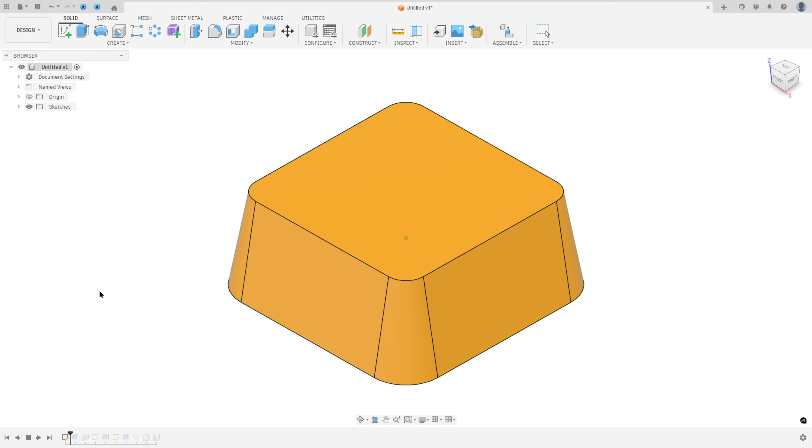Let's create one more tutorial in Autodesk Fusion. In this video, you'll learn to use extrude, offset plane, circular pattern, fillet, and shell. So open the Fusion and let's go.

The first step to create this part, we will select the top plane and make this sketch. And here we will create a square with 120 millimeters. And in the corners, we have a fillet with 19.4 millimeters of radius.

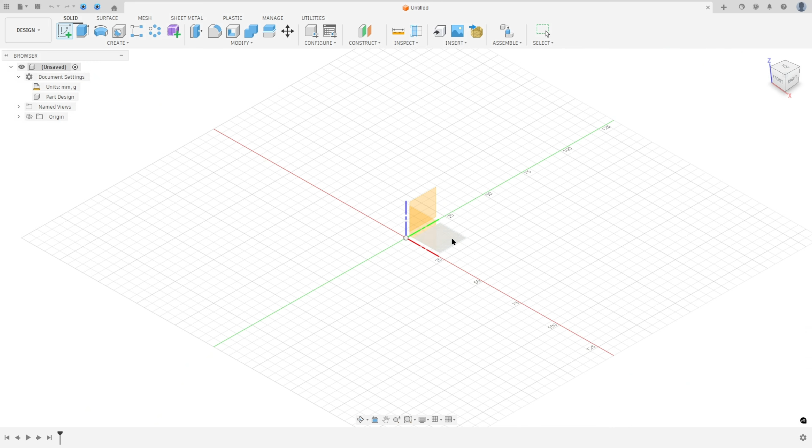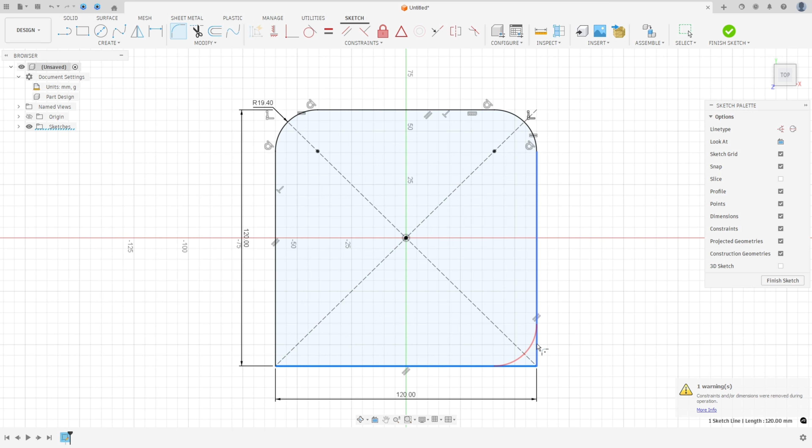So open the Fusion, go to create a sketch, select the top plane, select the 2-point rectangle, center rectangle, click here in the midpoint, 120 millimeters, and go to fillet, make a fillet here with 19.4 millimeters of radius, and press OK. Finish the sketch.

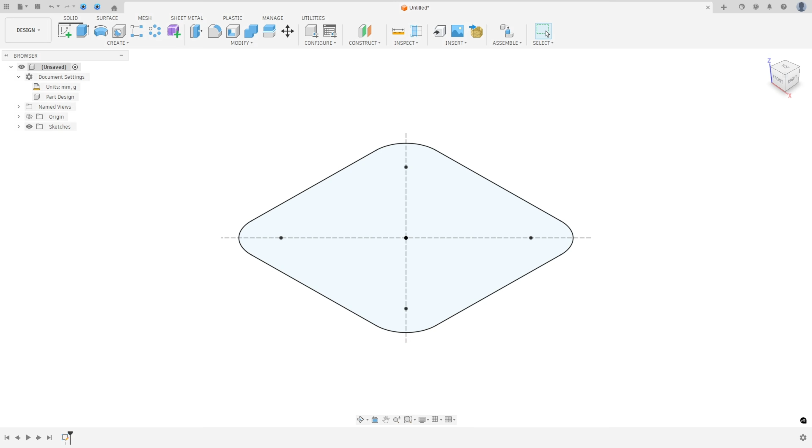We need to extrude this 50 millimeters, and we use the taper angle. The angle between this line and a vertical line here is 10 degrees. So go to extrude, select this profile, the distance 50 millimeters, the taper angle here 10 degrees, put minus here, minus 10 degrees to change the direction. Operation new body and press OK.

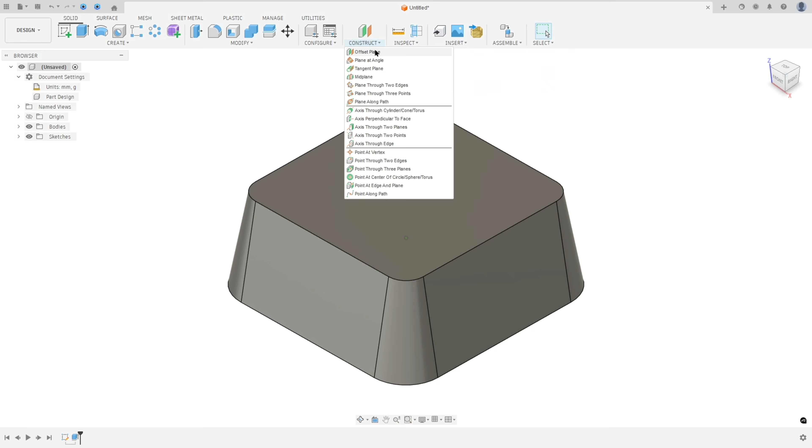And now we will create this cut here. And to create this cut, we will create a plane here. The distance between this plane and the top plane is 13 millimeters. So go to construct, select the offset, and select the top plane, the distance here 13 millimeters, and press OK. I will hide this body a little bit.

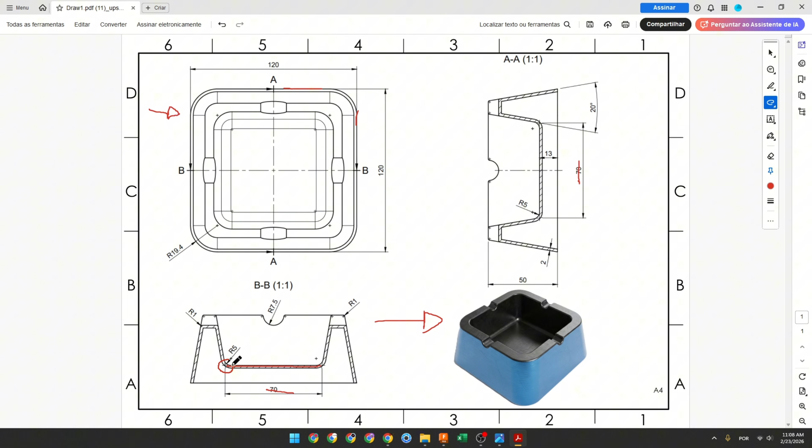Go to create a sketch and select this new plane here. In this new plane, we will create a square with 70 by 70 millimeters. And in the corners, we'll make a fillet with 5 millimeters of radius. So go to 2-point rectangle, center rectangle, click here in the midpoint, 70 by 70 millimeters, and go to fillet, make a fillet here with 5 millimeters. And press OK.

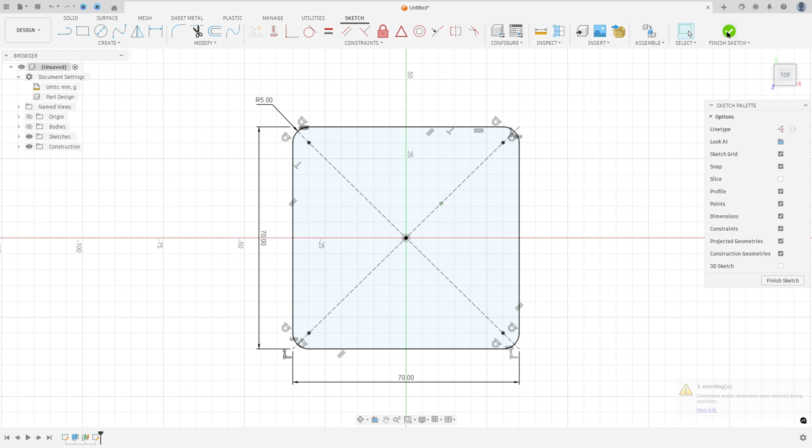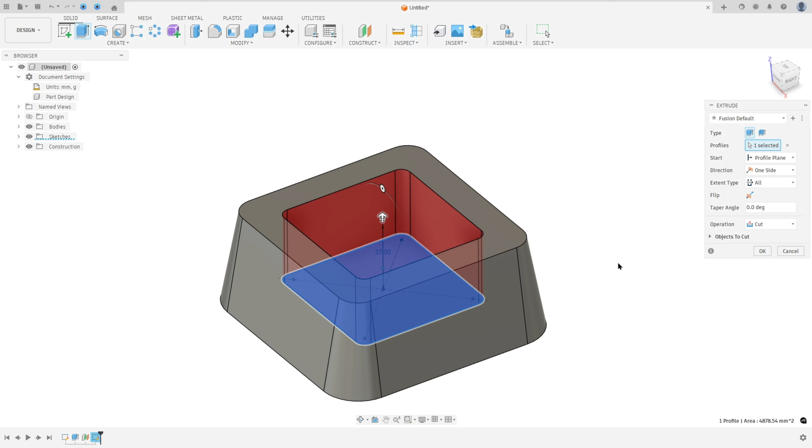And finish the sketch. Show this body here and go to extrude. The extent type here, select all. And the taper angle here will be 10 degrees. We made it 10 degrees on this side, plus 10 degrees here is 20 degrees, okay? So the taper angle here, 10 degrees. Press OK.

I will inspect this body here. Go to measure, select this face and this face. The angle between these faces, 20 degrees. Okay.

And now we will make this cut here. We need to make this cut on the 4 sides. In this cut we have an arc with 7.5 millimeters of radius, or 15 millimeters of diameter, in the center of this edge here.

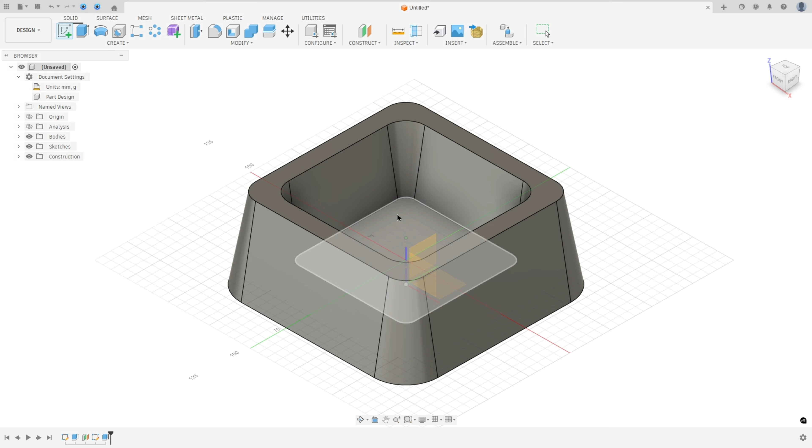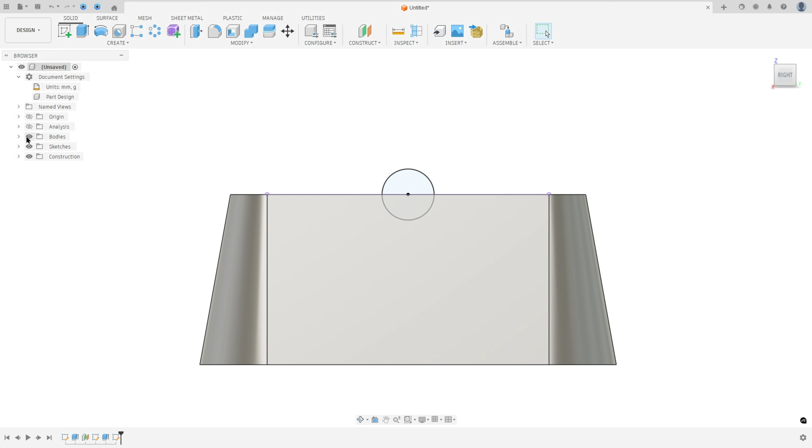So let's create this. Go to create a sketch and select the right plane, and go to create, project/include, project, select this edge and press OK. Hide this body. And here in the center of this edge, make a circle with 15 millimeters of diameter and press OK. Now finish the sketch, show this body and go to extrude. Select this profile. The extent type, select all, operation cut and press OK.

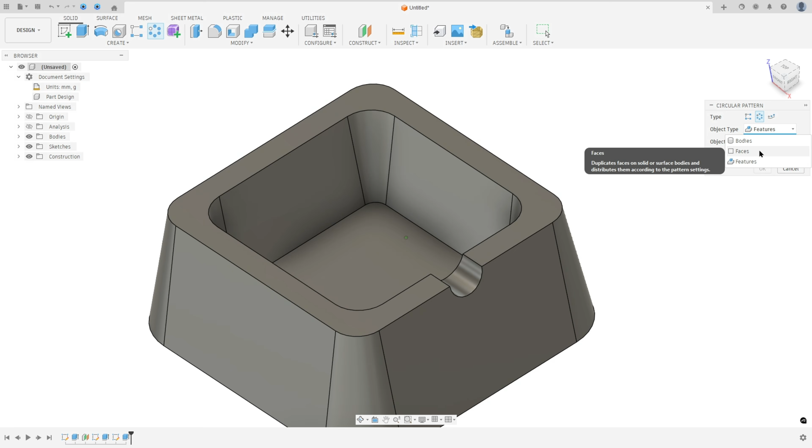And now go to create and select the circular pattern. You can select here or pattern, circular pattern. And the object type, select features and select this face here. And the axis, select the blue axis here. The quantity is 4 and press OK.

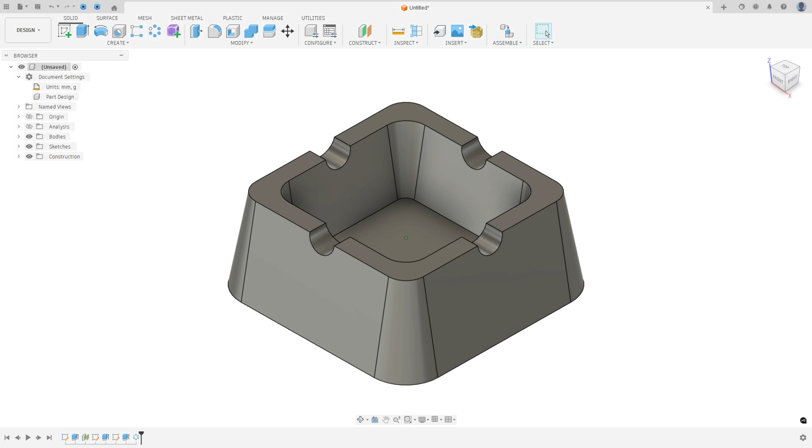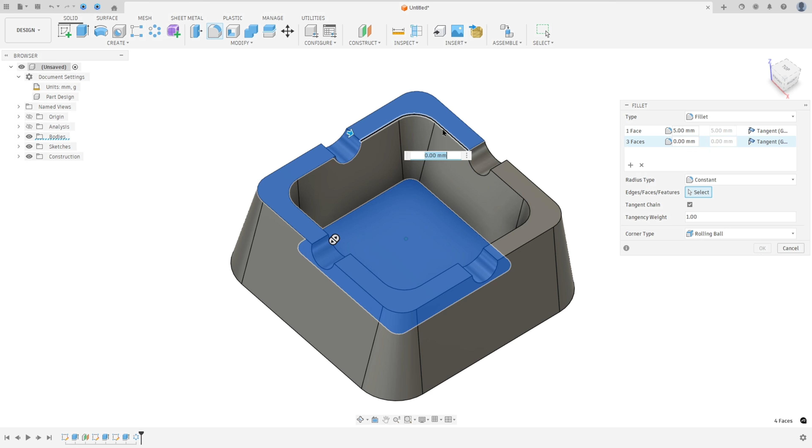And now we'll make a fillet in this body. Here inside we have a fillet with 5 millimeters of radius. So go to fillet, select this face here, the radius 5 millimeters, and select add selection set. And now we'll make a fillet here with 1 millimeter of radius. So select add selection set and select this face here. And the fillet here is 1 millimeter of radius, and press OK.

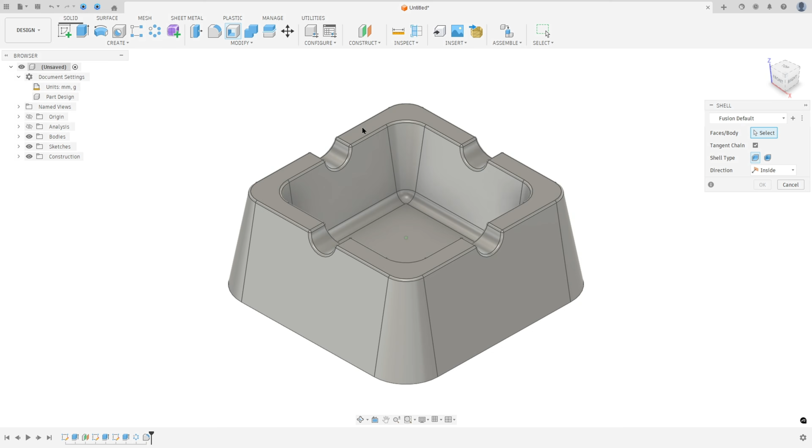We made this. Now we will shell this body, and the thickness of this body is 2 millimeters. So go to shell, select the face that we will remove, the bottom face, and the thickness here 2 millimeters, and press OK. We made this, and here we finish our exercise.